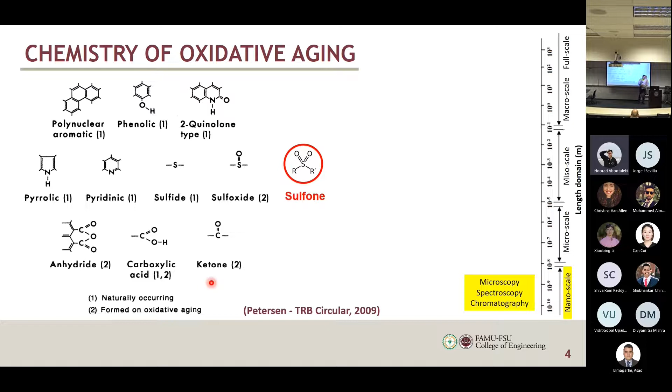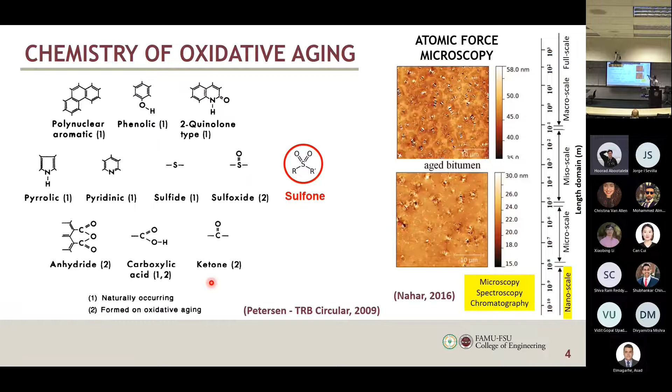And then we take this from the molecular level to what happened on the nanoscale, using atomic force microscopy, AFM. You can see the changes in the binder after aging. We study this using machine learning and digital image correlation, and try to see how we can quantify the changes in the binder microstructure and phase behavior due to the aging that happens on the molecular level.

And then we look at, for example, an example of a spectroscopy technique - we use FTIR, Fourier transform infrared spectroscopy. For this one, we can really quantify - these are two replicates, by the way, so the data is repeatable. You can look at the carbonyl peaks, the C double bond O.

They have different formations, different acids and carbonyl components, but we can detect it here with FTIR. We can look at the sulfoxide peaks here, with an increase in this peak and this peak. We can track aging. And then we normalize this data to a peak that is not affected by aging, so you can really get everything on top of each other. I'm sure people from different disciplines have probably used FTIR at some point.

And then we have the toluene peak. Why do we care about this peak? This is the solvent that we use to extract the binder out of the mixture, so I always want to check this to make sure that I don't have any residues of this solvent in the material.

And then we have sulfone peaks. If the temperature was not correct or whatever, we can detect further reaction of sulfoxide to sulfone. So we look at carbonyl and sulfoxide, and this is the parameter that we use on the chemistry level to track aging.

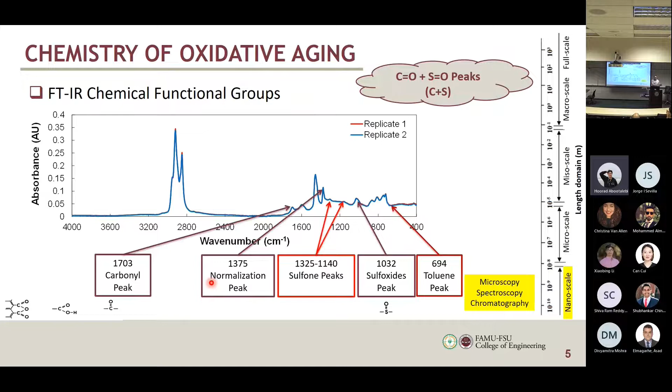Another tool we use is chromatography, so we look at the different components of the binder. The binder liquid looks like a black sticky material, but if you look at the components, you can get a powder out of it, which is the black substance called asphaltenes, and then you get three different oil-like materials out of it: saturates, aromatics, and resin. These four components together form the colloidal structure of asphalt or bitumen.

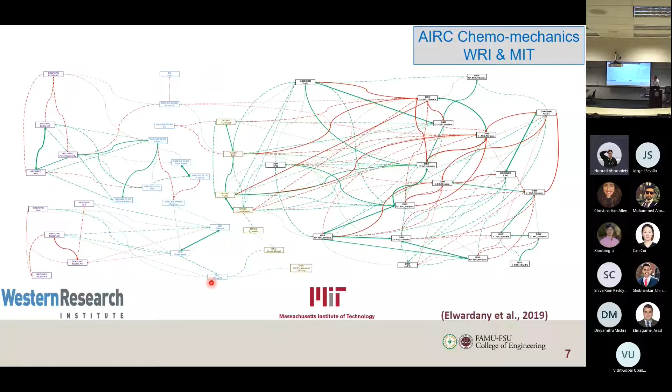So we also did other correlation techniques to study the correlation between different parameters. The main idea here is that we were able to link certain parameters we get from GPC, SEC on the microstructure level of the material using elemental analysis, SARA-AD, and OX13 determinator. This is information on the microstructure of the material - chemical information. We were able to link that to thermal properties, rheological properties, all the way to get a black space curve for the material. So this is the rheology or thermomechanical property of the material, and we can trace it back to the chemical and microstructural components of the material.

And if you look at this spaghetti model, you can see those red and green arrows. Green means it's a direct relationship, red means it's inverse. And as you see, if the line is thicker, that means it's a stronger correlation; if it's thinner, it's a weaker correlation, and so on. So we can really dissect this material and try to understand how the changes on the molecular level can change the binder property on the other scale.

Going back to the rheology of the material. So that was the last part of this map, right? So what is rheology? Rheology is the science of the flow of the material. If you have any liquid and this liquid is flowing over time, you can study the flow of this material using rheology. Some well-known rheologists say every material is a liquid. Even if it looks like a solid, if you give it enough time, could be thousands of years, eventually it's going to flow like a liquid.

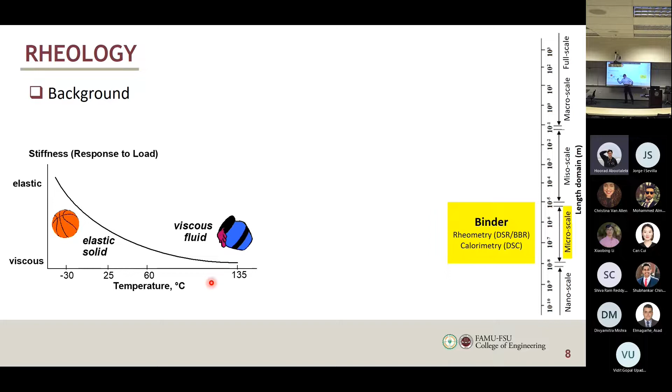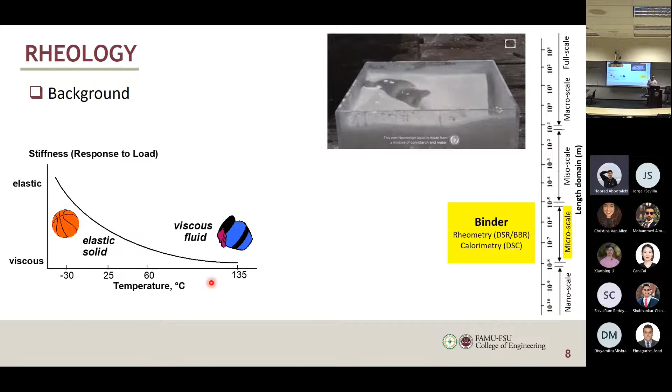And that's why we call this a material that has a memory, because it remembers - the response doesn't just depend on the rate, the way you load it right now, it's about the history of loading. What happened to this material over time? That's why when you hear about memory foam, it's because this material has memory and can give different responses depending on the rate of loading and the history of loading.

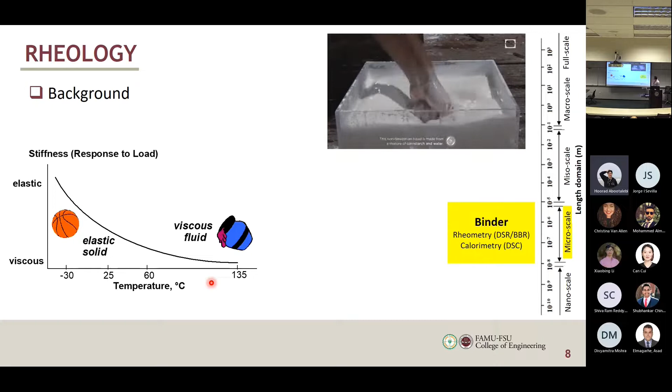Then there is, between the rate of loading and the temperature, something called time-temperature superposition. By the way, you can apply this in polymer science. You study this with different materials - material science. This is basically material science, it has nothing to do with pavement. But as you can see, asphalt is a viscoelastic material, and that's why we study it.

Just imagine that you have a can of asphalt, and you put this can at 60 degrees C and at 25 degrees C. Of course, the flow from the can of the binder is going to be much less at 25 than if you try to keep it flowing at 60 degrees C. It will flow more, or it will leave the container and get out like this. So the flow is more at higher temperature.

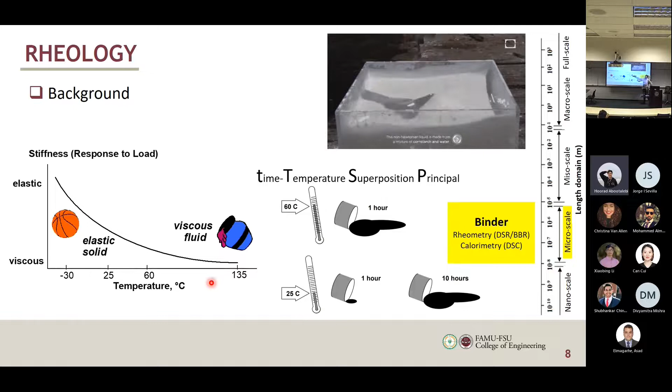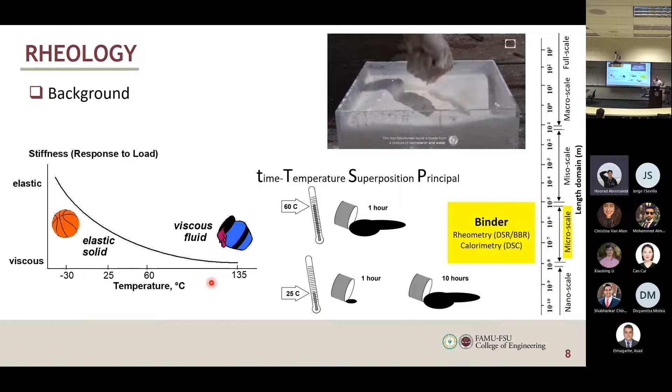However, if you leave this can for a longer time, not just at 1 hour, if you leave it for longer time, eventually it will continue to flow until the response would be equivalent to this one. So for example, if you leave it for 10 hours, you will get the same response of the material at lower temperature, but using a longer duration, right? So that's called time-temperature superposition. It's the idea that time and temperature are kind of related.

So we take the binder - now we moved from the nanoscale to the microscale. This is the binder, the liquid component. Then we look at the bulk property of the material in DSR. We look at dynamic shear modulus. We look at it at different reduced frequencies. Reduced frequency here means both frequency and temperature combined - we combine temperature and frequency using time-temperature superposition, and we use the term reduced frequency to study the material.

And as you can see with aging, the material gets stiffer, especially at lower rates of loading or high temperatures. So this is the aging effect of the material at different aging levels.

Now, we don't just use rheometry and calorimetry to study material properties. We can also use viscoelastic continuum damage, fracture mechanics, all these things. And this is actually a big research need or research gap in our field right now.

Sometimes I say that asphalt may be the only material that we use as engineers without breaking it apart. We still use it for design and stuff like that. We study the response in the linear viscoelastic region without breaking it all the way to failure. And that's a gap in our field.

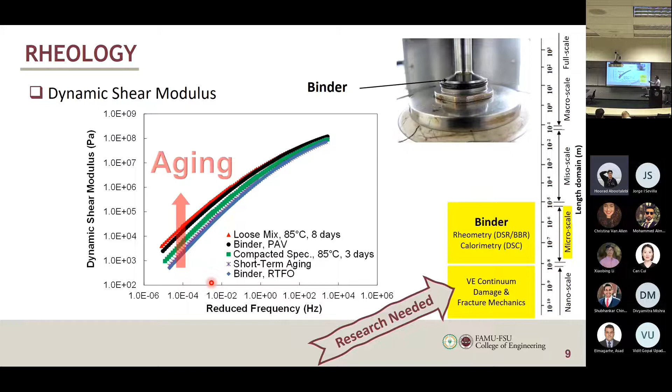However, we did a lot of research recently to try to overcome this gap.

Then we take it one step further. So if we add mineral filler to the binder, you can see on the left-hand side these are the binders at different aging levels, and this is the mastic at different aging levels. You can see the change on the molecular level — remember, the binder changes due to aging are on the molecular level, and this is changing the binder properties. If you add the mineral filler, it changes in a different way. So we can build models to see how the material changes at different scales due to aging.

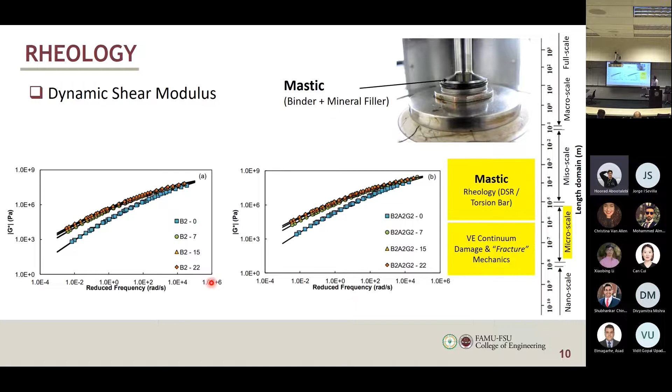Then we can take it one step further. We're using almost the same instrument, but you can see the change from here to here. Now we've started to use larger aggregates called fine aggregate matrix — the fine aggregate, the mineral filler, the binder, and once we add the fine aggregate, air void becomes a function of the material as well. We try to see how the change on the binder and mastic levels affects the change on the FAM, or fine aggregate matrix, level.

You can see those are different FAM samples at different aging levels — again, stiffer material due to aging. The difference between the left-hand side and the right-hand side is the air void: this is 4.5% air void, this is 7.5% air void, and so on.

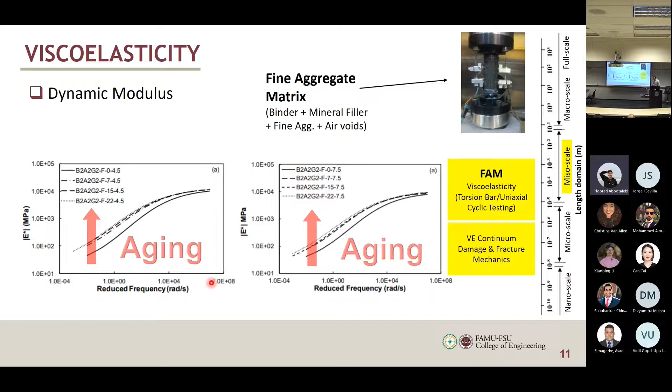One thing important when you do testing and multi-scale characterization and modeling: you have to think about the properties of each scale and what kind of loading rates apply for these scales. It's not the same as the full scale. So you have to consider all these things in your scaling problem.

Then we take all this to the full mixture scale — this is the mixture that we use in the pavement. We have to use stronger equipment, but we can generate the same kind of data. This is short-term aged, not aged yet for long-term. Then we have 5 days, 11 days, 21 days of aging, and you can see the change in the property on the mixture scale.

The beauty of understanding these things is that you can build a model, and if you build the right model, you can now predict what would happen at the full scale depending on what happens at the chemical scale or other scales. So you don't have to go to the lab each time you run the test. That's kind of the big picture of how these things may work.

Now, it's not just about the modulus of the material, it's also about the phase angle. Phase angle means that when you load the material, the response will be delayed for a little bit — there is a time lag for that. Same thing with memory foam: if you put your hand on it, you'll have an indentation, and if you lift your hand, it's not going to disappear right away. It's going to take some time. That's the phase lag, or phase change, that we're talking about.

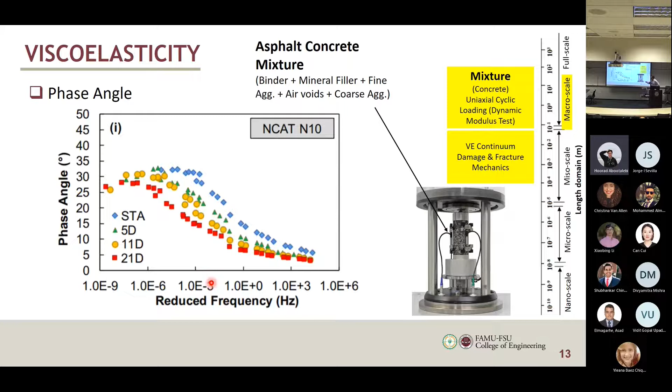So this is the phase angle, and due to aging, phase angle decreases. It's a stiffer material with less phase angle, which means the response is more elastic.

Now we have to stop for a second. There's something weird in this slide. Look at the frequency here: 100,000 hertz. Do you know what this means? It means you need to run 100,000 cycles in 1 second.

Do we have a piece of equipment that can run 100,000 cycles in 1 second? If we have this, it's going to be very expensive, right? The university can't do something like this. And look at the other side.

This is 1e to the minus 9. This means that for 1 cycle, you need 1 billion seconds, which is 31 years. Imagine if you are a graduate student, you need to generate this data point. You need 31 years for 1 replicate, and your advisor will tell you 3 replicates at least, right? So how do we get this data? It's out of our physical ability to run the test, right?

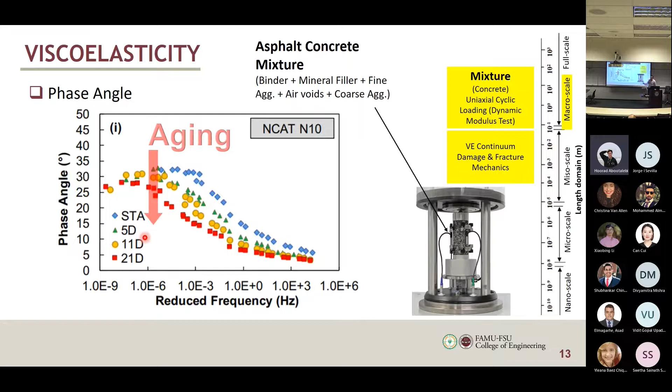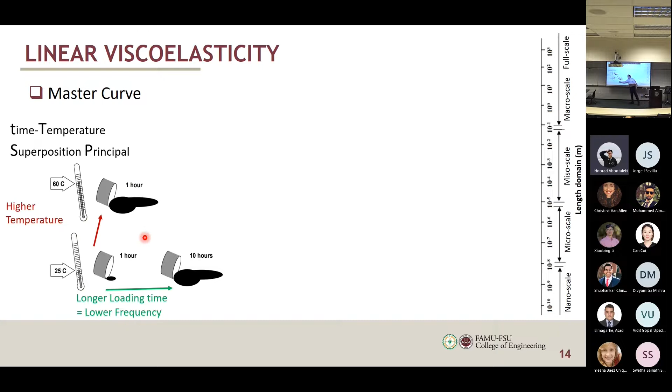And that's when we start to think about the material again. Remember, I talked about time-temperature superposition and how longer duration of loading would be equivalent to higher temperatures? So now we're using the complexity of the material in our favor to understand the material behavior. Longer duration means higher temperature, longer loading time means lower frequency. Frequency equals 1 over time.

So that means the physical test that we run is only between 0.1 and 25 hertz. That's all our ability to test the material. But then we test the material at high temperature and we get softer response. This is the model. At low temperature, we get stiffer response, and in between, we get the reference temperature.

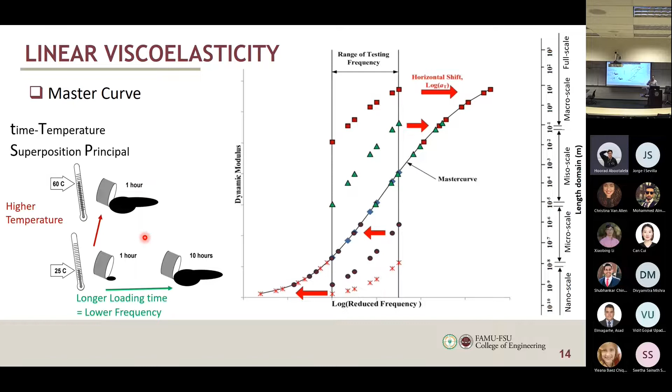This is the temperature where we want to build the master curve. Here, higher temperature means lower frequency, so the higher temperature response could be shifted to the lower frequency. Low temperature could be shifted to the higher frequency. That's how we study the material over a wide range of frequencies, not by physical testing, but by modeling. So modeling gives you a very nice capability of studying the material.

For fracture mechanics, people can either use fracture mechanics or continuum damage mechanics. The main difference is that in fracture mechanics, you have a crack. You're trying to study how the crack may propagate through your material, what happens at the crack tip, in the cohesive zone, and how the crack is going to propagate and so on. This may apply very well for macro cracks.

In continuum damage mechanics, we do something else. We deal with the material as a continuum. I don't care about each crack, I don't care what happens at the crack tip for each crack. I'm going to deal with the material as a whole thing and say, instead of the material having the initial modulus, it's going to have a reduced modulus. This might be more relevant to micro cracks instead of macro cracks.

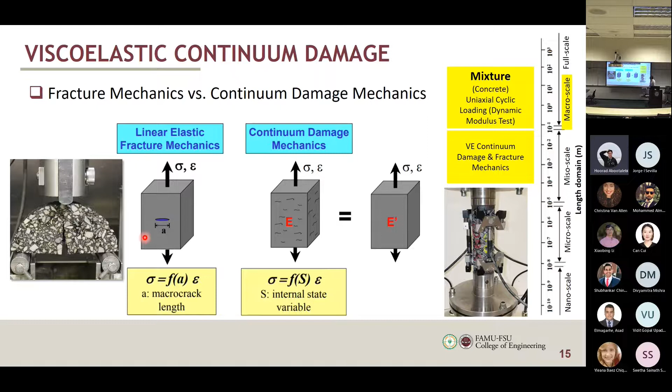So you may start, if you want to do a very comprehensive modeling, with this and then jump to that, or it depends on what kind of model you're trying to do. And there are test methods to do each one.

I'll give you an example of continuum damage mechanics. We get something called the damage characteristic curve. It's very interesting because this is the change in the stiffness of the material. One means that you have the same stiffness as the original material, so this means no damage.

That's one. And then as the damage increases, this is the damage parameter, the internal state parameter, and you're studying how much the modulus decreases with the increase of damage in your material. This curve is like your fingerprint, the fingerprint of the material.

It's material dependent. And the beauty of this curve is that you can see all of them fall on the same curve. They were tested at strain control versus stress control, higher temperature, lower temperature, because we can shift them with time-temperature superposition. You can do this with crosshead controlled or on-specimen controlled. Any test method, load the material, no matter how you load the material, you will always get the same response if you do your math and your testing correctly.

So that's why we call it characteristic curve. Then we need something called failure criteria, where we define when the material is going to fail.

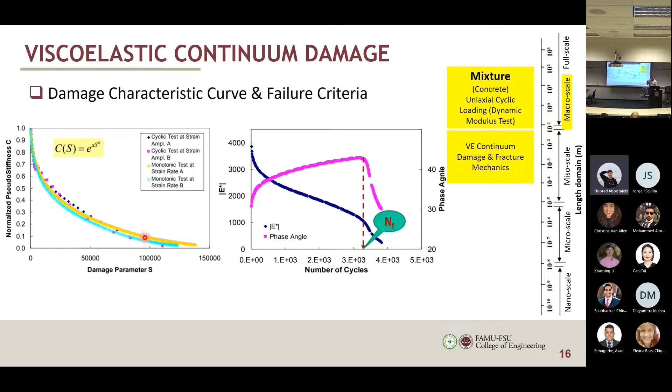Here it means the inflection point for modulus and the sudden drop in the phase angle. Why does phase angle drop at failure? Because the void created by the crack is elastic, right? You load it, you get the response right away. That means there is no time lag for the crack itself. That's why there is a sudden drop in the phase angle.

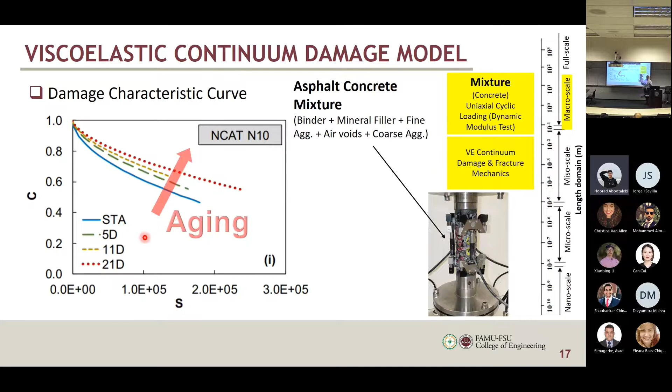So again, we go back to aging. We get different damage characteristic curves due to aging, and then we get different failure criteria due to aging. Eventually, you get all these four pieces of information: modulus, phase angle, damage characteristic curve, and failure criteria.

You combine all these things with pavement structure, base, subgrade material properties, traffic and climate, and you get pavement simulation. So we have finite element models.

This is called FlexPave, and we can study how much damage happens at the bottom of the layer before and after aging. So that's the aging. You can see with more aging, you get more damage in the cross section because the material properties have changed. You can also see you get much more damage at the top. So some of the cracks start from the top and go down, and some other cracks go from the bottom.

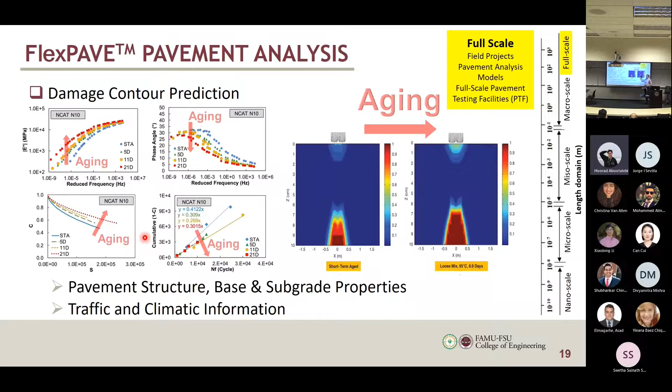Then we take all this and run actual full-scale test facility tests. This is the facility we have at Federal Highway in Washington, D.C., in McLean, Virginia. You can see we compare these test results with our simulations to make sure we get a good correlation, and we can study this also with aging and so on.

So this is kind of the main part I wanted to discuss with you all. Don't worry about all the details and stuff. This is maybe for the asphalt folks, but it's for everyone. You can just see how the material can change from one scale to another and so on. So I prefer to take a second here, let's just take my breath. If you have questions, please ask. I'd like to take a question or two before I jump into something else.

You're saying that the pavement looks black and nice at the beginning, and then it turns white? Yeah, that could be. It's also related to friction of the tire and how you may lose some of the binder that coats the aggregate surface at the top. Over time you may lose some of this binder film at the top, and that's why the color gets back to a whiter color a little bit.

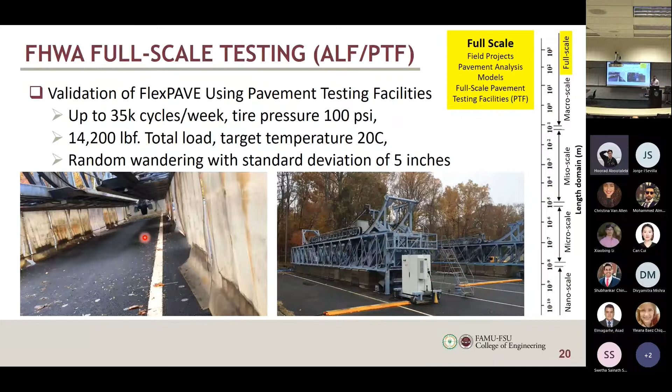One thing I wanted to share with you, the next part of the discussion, is what's missing in this slide? I showed you how this whole thing works out, but the problem is we don't know - we aged this material to 5 days, 11 days, 21 days in the lab. How is this related to the field? If you're trying to simulate a pavement section in Florida versus another in Montana or Wyoming, do you think you would get the same kind of result? Should we use the same aging protocol in the lab to simulate these pavements?

No, right? We need to think about what 5 days represents. Does it represent a pavement in Florida, Texas, or New Hampshire? Does it represent a pavement after 10 years or after 20 years? Is it the surface of the pavement where aging is much faster, or deep into the pavement section?

So we need to link all these things, and all this data needs to be fed back into the pavement simulation. If you're simulating 20 years of pavement life, you need to feed hourly climate data for this location. You need to update the material property, because it's changing due to aging. And when the material property changes, the stress and strain response of the pavement system would change because the material has changed. So you can see this is a very complicated problem.

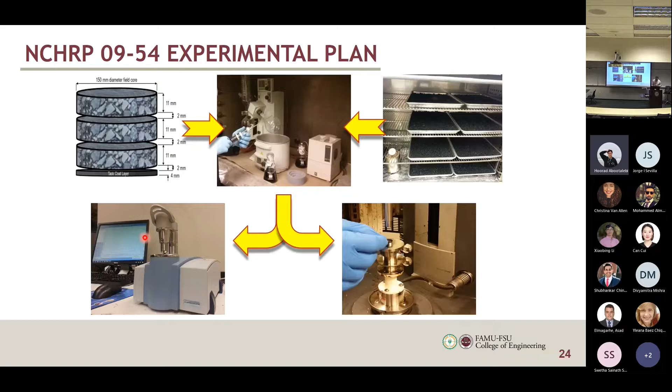For kinetics modeling, we did isothermal and non-isothermal. Basically, to build your model, you need to make sure it's working for non-isothermal conditions, because field aging is not isothermal, right? The changing temperature. So this is the basic model from Texas A&M. There's a lot of chemistry here. Aging starts faster and then goes slower. We use some chemical kinetics modeling here to study the material.

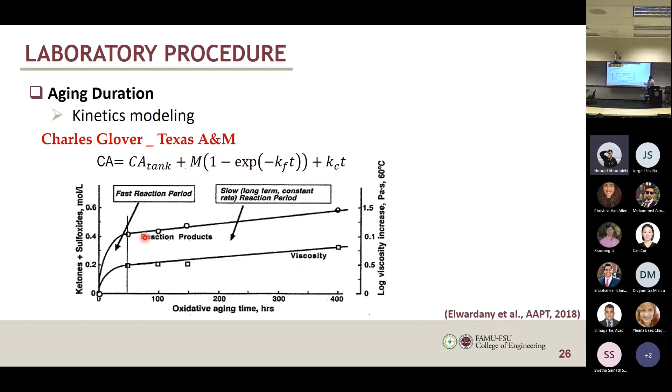This is the WRI model. Then we came up with our own model because we found that those two models are the same, just different mathematical representations. If you boil everything down to mathematics, you can do a lot of nice things in the research. Then we came up with this model, which is basically the same thing, except there are different definitions and different meanings for the parameters.

The main idea is that now we have a material, we have a kinetic model that can tell us the rheology after aging from the rheology before aging, with one single parameter. So you have one variable. This is the material-dependent property that you can get that will tell you how this material is going to age. And these are the kinetics, the Arrhenius equation functions. Those are constants for any material, and we have only one variable for each material.

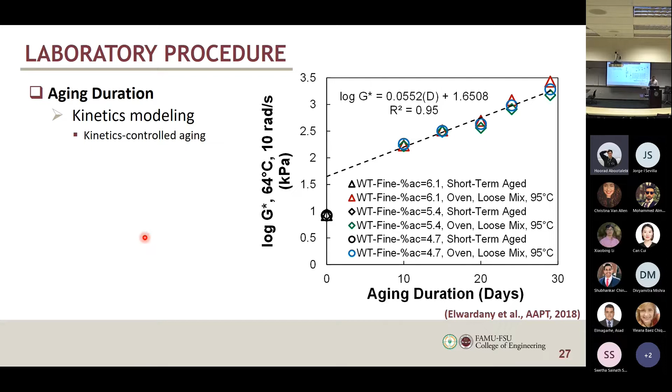One thing we did is make sure it's a kinetics-controlled aging reaction. So basically, we added different contents of binder to the material. When we aged them, we found that they all have the same rate of aging. That means the film thickness of the binder is not a factor in this lab aging.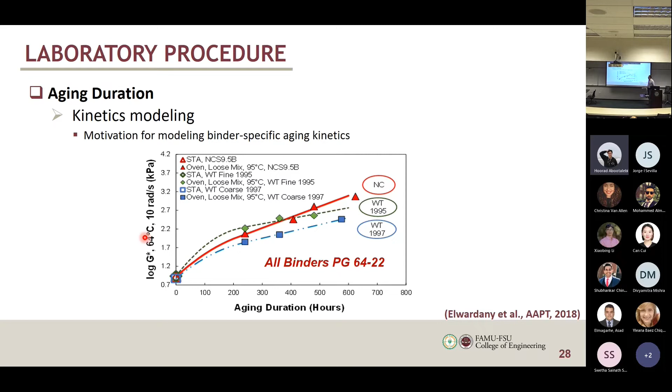And you can see we tried different materials. The idea here was that if I have one variable in the equation, that means I just need to try this once, get the variable, and then I have everything, right? So we did aging at 95 degrees C.

We get these points, we fit them, and get the M parameter. If I have the M parameter, I can predict how this material is going to age at any other temperature. So I age it at one temperature, get how it's going to age, and use the model. This is really the beauty of modeling, that you can get a lot of information out of simple testing. We did some validation studies, and also tried non-isothermal aging, proving this model works for different aging conditions and temperatures.

Then we went back to the kinetics modeling to think about lab versus field. In the lab, you use only one temperature, 95 degrees C. But in the field, you have different temperatures. So how do we bring those together? Our goal is to match the lab aging to the field condition.

So we put the same equation, one for the field and one for the lab, side by side, and found something very interesting. At the end, the goal is to match those two things together, the same product in the lab and the field. If you look at the equation, those material-dependent properties cancel out, which means you can come up with a closed-form solution, one equation.

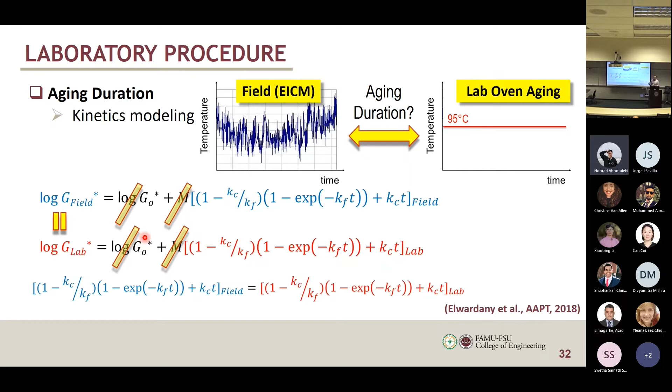In this equation, if you put 95 degrees C for the temperature, and the hourly temperature history of a given location on the other side, you can match them together and come up with a duration in the lab. And that's what we did. We were able to come up with an index and a map representing aging in the field, regardless of what binder is used.

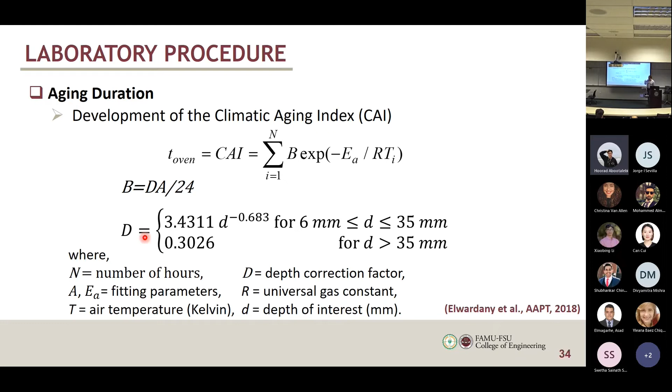So this is the development of the climatic aging index, and this is the equation from doing some simplifications in the model. We also did a depth correction factor, because at the surface you have photo-oxidation from ultraviolet rays from the sun, and at the bottom you have lower and lower aging, not just because temperature changes, but also oxygen depletion as it percolates through the interconnected air voids.